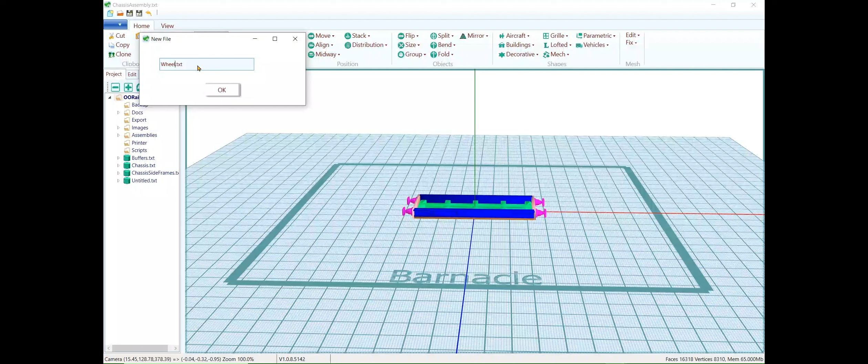Let's crack on. I'll create a new file to hold the wheel mount. Click on the project and add a new file to it, and type in the name of that new file.

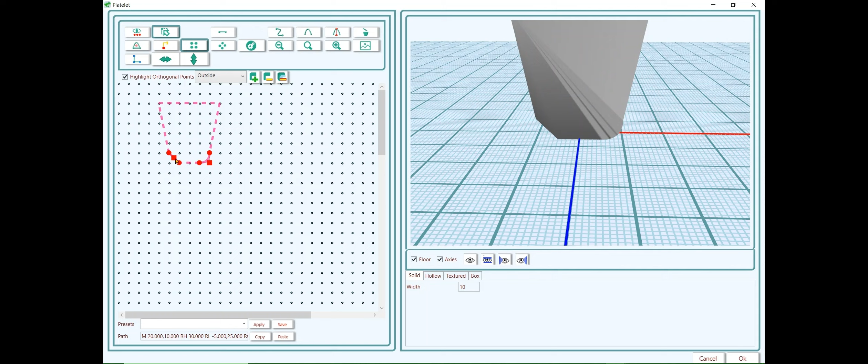I'm going to make the base of the wheel mount using a platelet. I'll start by drawing in the rough shape using straight line segments. I'm not worrying too much about the size here, I'll sort that out later once we've got the basic shape right. And close the shape. Now I'm going to curve the little bits at the bottom by turning them into Bezier curves. That's fine, and I think that's it really.

Now I'll rotate that onto the bed and center it. Now I'll adjust its size by going to the object palette and type in the dimensions recorded previously on the Inkscape diagram.

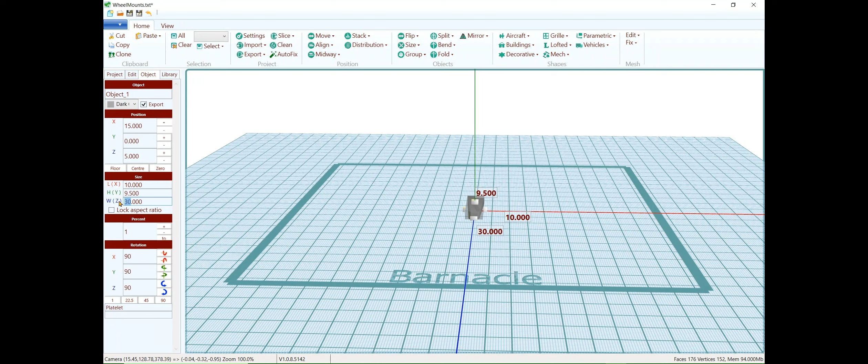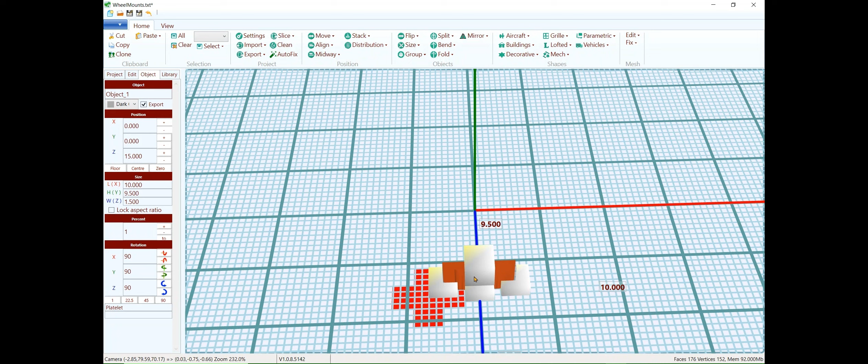That does not look right, something's gone wrong there. Oh, I've got the Y and Z dimensions the wrong way around. I'll just change those - hey, these things happen. I think that's a bit better. So let's center it again, I think, and floor it.

Now I'm going to make the mounting plate for the axle. I think I'll make that out of a squircle. I'll round off the corners and type in the dimensions I'm taking straight off the Inkscape plan. There's nothing magical here really, just type in the numbers.

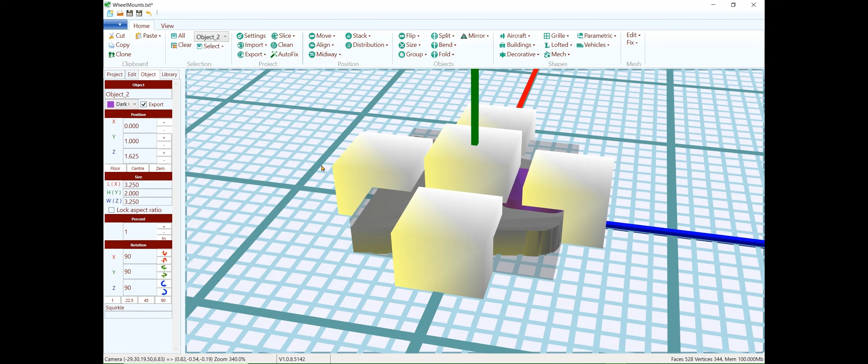That's it, and I think we'll change his colour to differentiate him from the base plate. Now I'll stack him above the base plate. That looks fine, zoom in a bit so we can see. I'm going to position him towards the front of the base plate using align front, then nudge him back a little using the cursor keys. That looks fine.

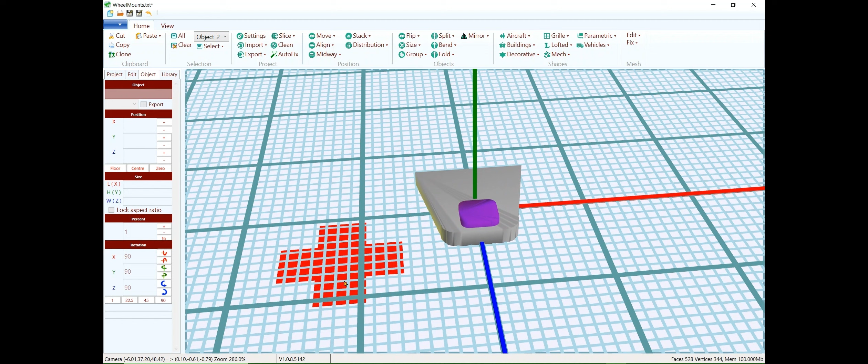So now I'm going to add a little lug to the back of that plate. I'll start by putting in a box primitive and resize it, making it fairly small. What do we think? Oh well, let's see what Inkscape says. Yep, and the Z.

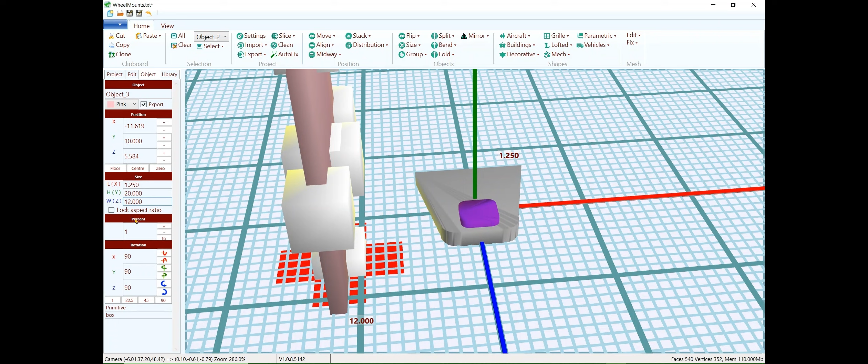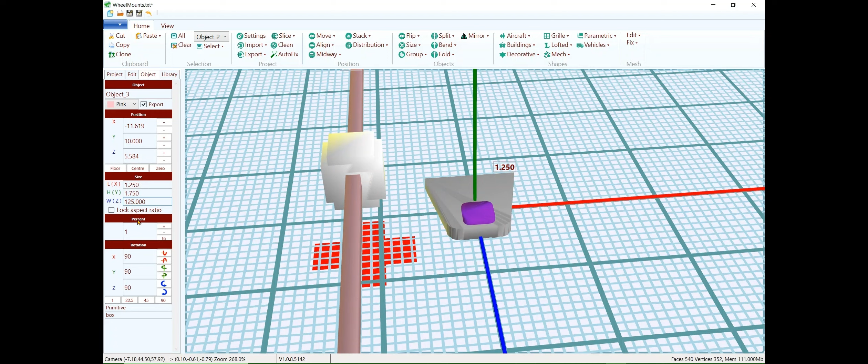Oh, do you know, I think there is some issue here with the way these text boxes are taking the numbers, I might have to look at that. It shouldn't be this hard to get these numbers entered, something's gone slightly awry. That 125 should be 1.25. Yeah, I'm having a little trouble getting this to set the right number, I think I'll need to look at the code to sort that. But there we are, we've got it now.

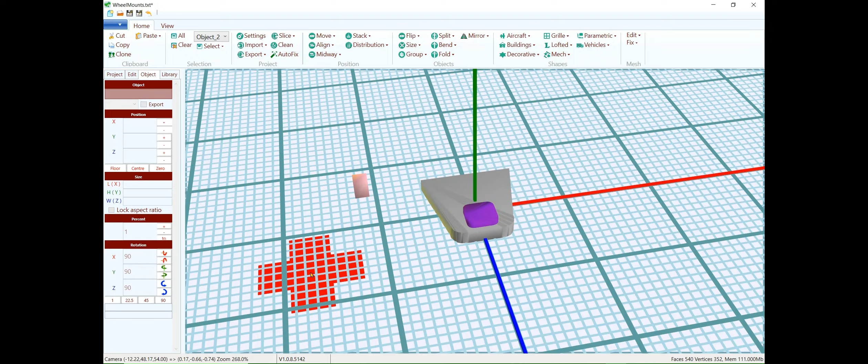So I'm going to stack this behind the platelet. Cool, that's the effect we're attempting to achieve.

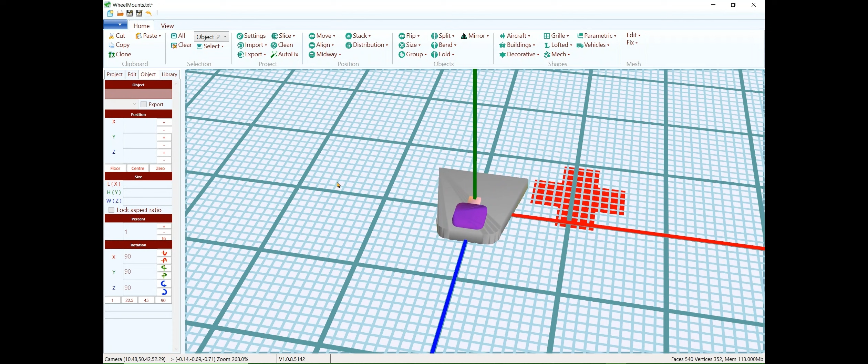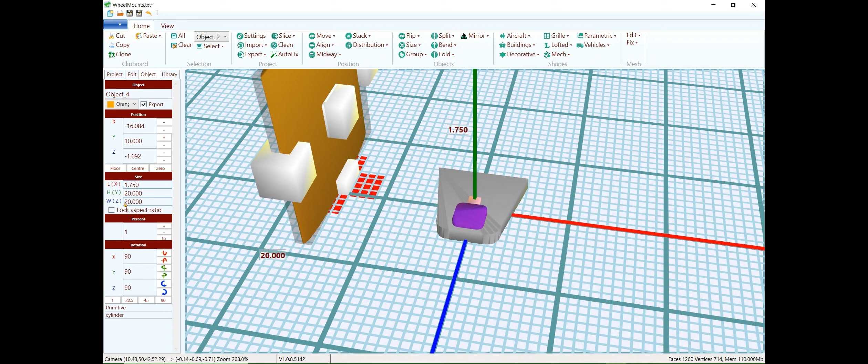Now I'm going to add the axle support, which I'll do just using a cylinder. It's pretty much the same as the last thing - I'll grab a cylinder here and resize it. That should be 1.75 as well. Cool, the height is a wee bit high at the moment, I think. Let's adjust that, it's not really particularly critical what the height should be.

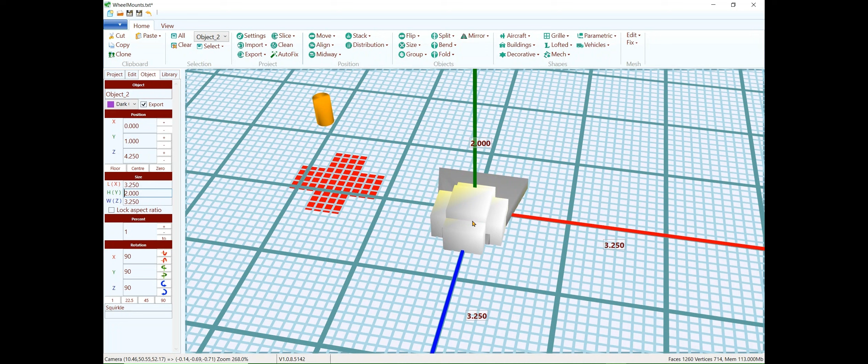I'm going to stack that on top of the support plate, and I think I might push it in a little bit as well. Let's have a look - yeah, it's a bit on the high side, let's push it down. Floor it down. Cool.

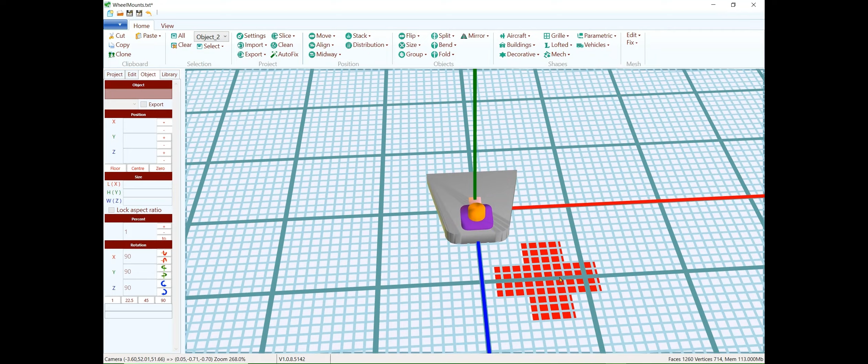So the next thing to make, I think, is the leaf spring. Not really going to make a complete leaf spring, we're just going to make a shape that looks vaguely like it. So again, I'll use a platelet, and count along these grid dots here - I know the shape I want to make. That's fine, these will actually form the leaves of the springs. Go along a bit and then reverse that pattern going up to the top.

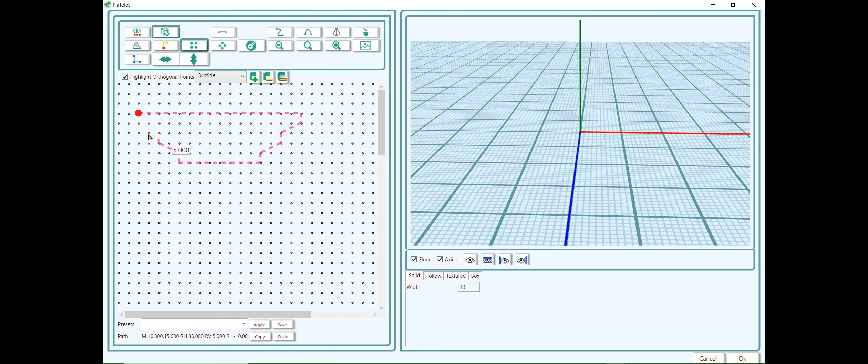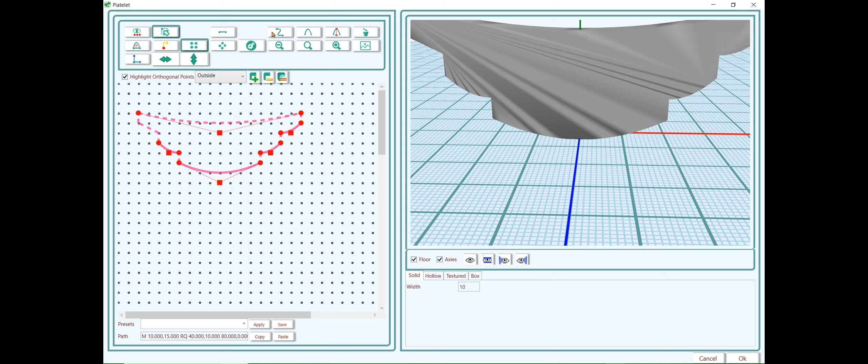It doesn't look like much like leaves at the moment, but now if I turn that into a bezier and drag it down, and the same on the bottom, then I'll go around and do the same with the edges. You could leave those flat, I suppose, but I think I'd prefer to just bezier those in as well. Just dragging the points to the nearest grid point, that'll be good enough for this. Once again, I'm not worrying too much about the actual dimensions, I'll sort that out once I've got the basic shape.

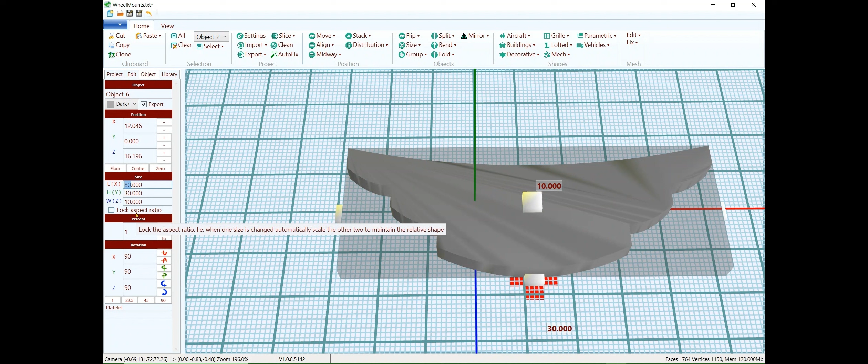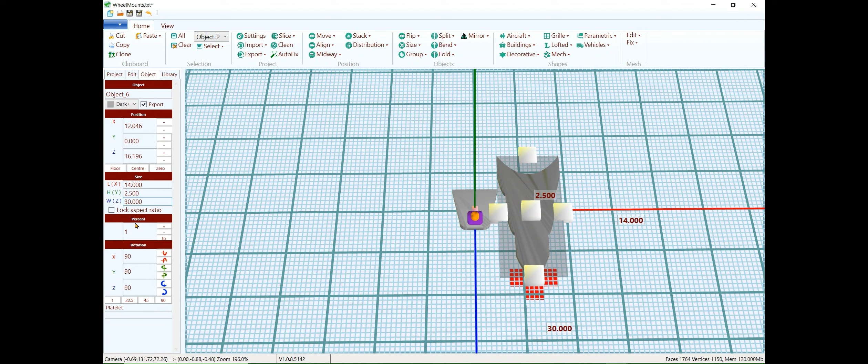Let's rotate that over onto the bed, so that's the correct alignment. Yep, it's big enough to cover the entire plate, so it is perhaps a little on the big side. Resize it then. That's cool. The height wants to be a little bit thicker than the base plate, I think.

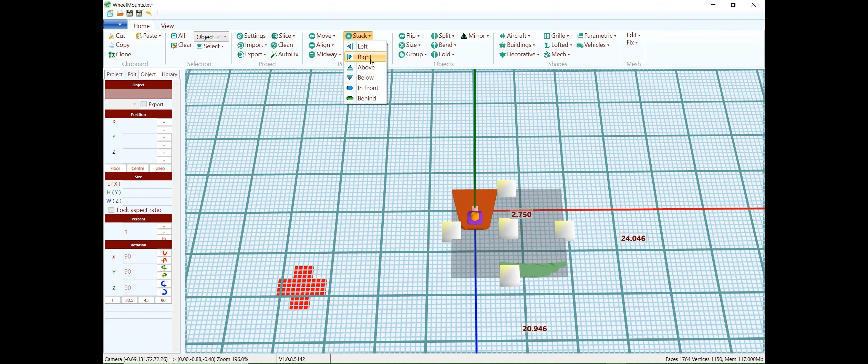So let's position it by stacking it behind, I think, yeah, behind the main plate. And then I'll align the back edges, that should bring it into position. Let's zoom in and have a little look. Yep, that looks fine.

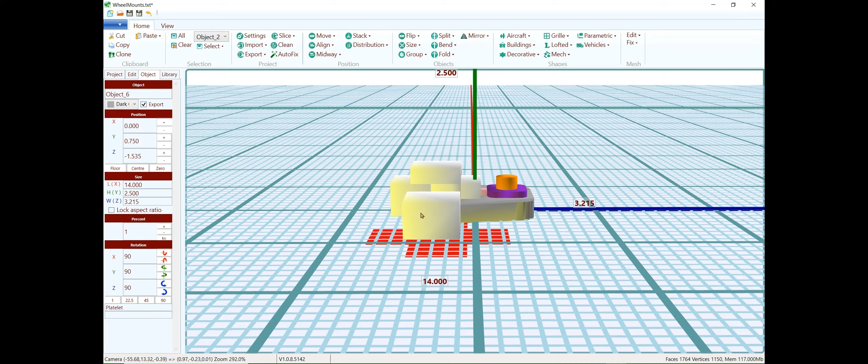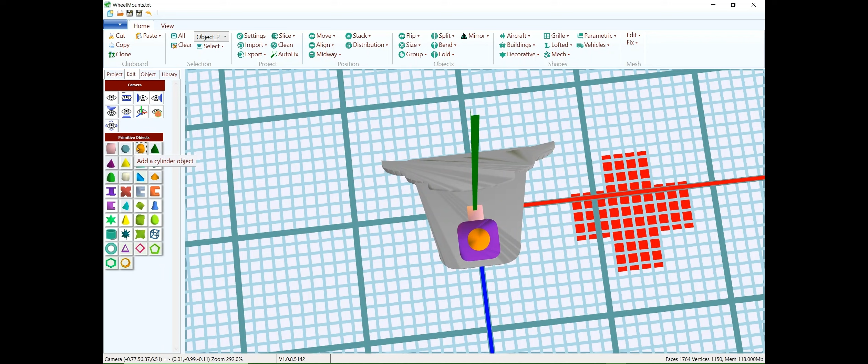The leaf spring has a couple of cylinders at each side. I'm just going to add those in as primitives. So I'll create the first cylinder and resize it now - actually, I'll make it the same size as the axle mount.

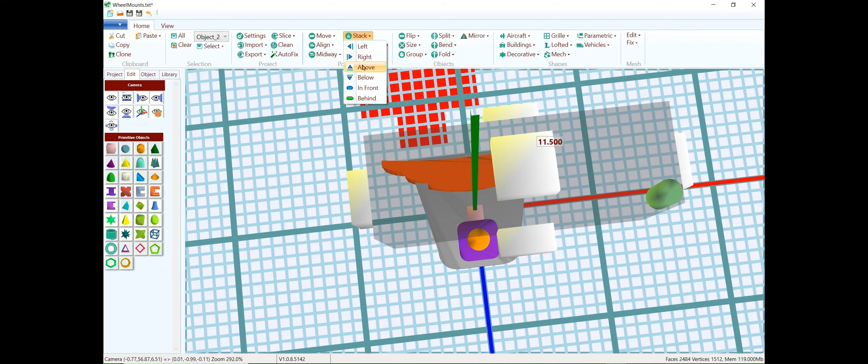I'm going to position that to the left of the springs just by stacking it there. I'll manually adjust its position, I think, by... no, that's fine, that's fine.

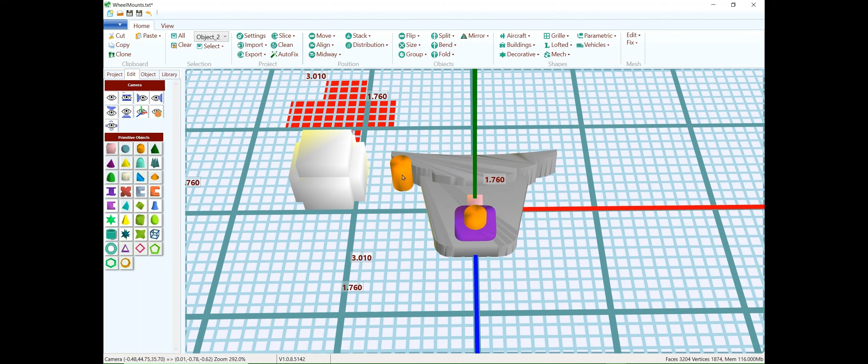I'm going to clone that and position the clone to the right of the springs. Back in white so we can see them, then stack it to the right and adjust it back in again. Yep, those look absolutely super.

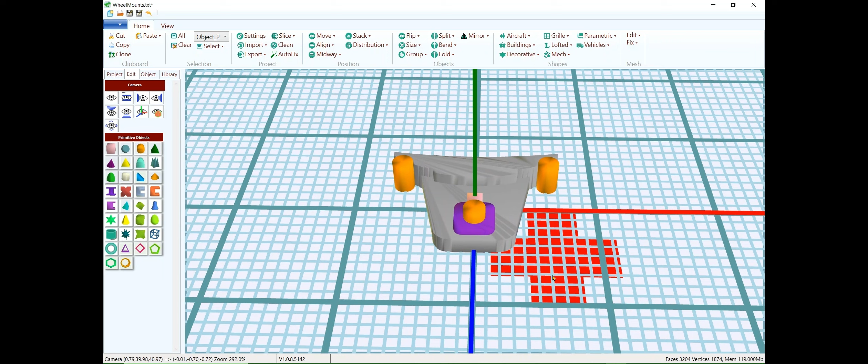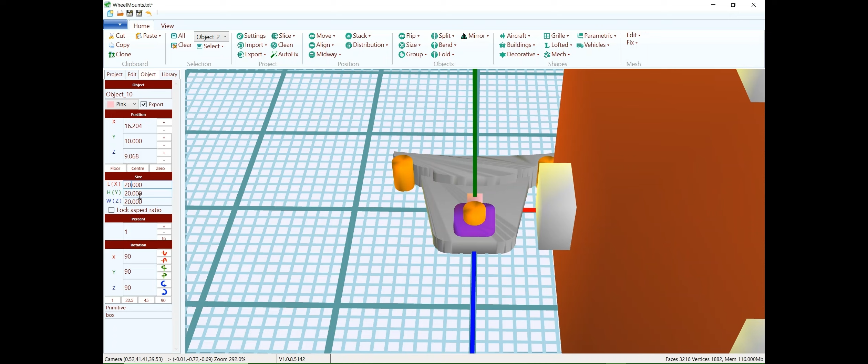So let's add some spring straps, just using basic cubes. I'll add a cube here and resize it, just adding a little bit of detail to the strap, and change its sizes to something reasonable.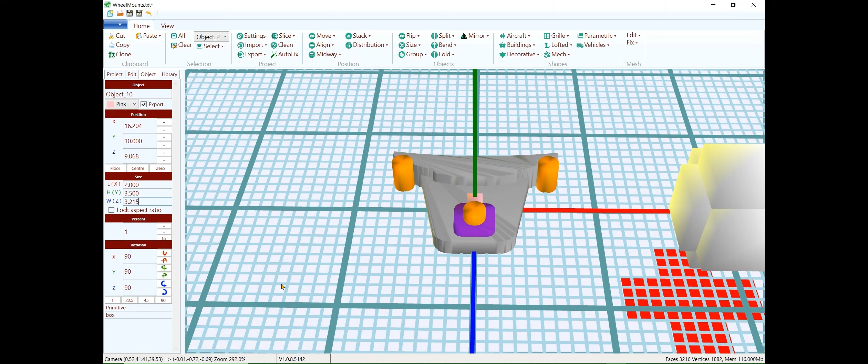Yeah, it's probably about it, I think. No, we don't want it too deep either, do we? That's fine, and now let's move it onto the spring itself.

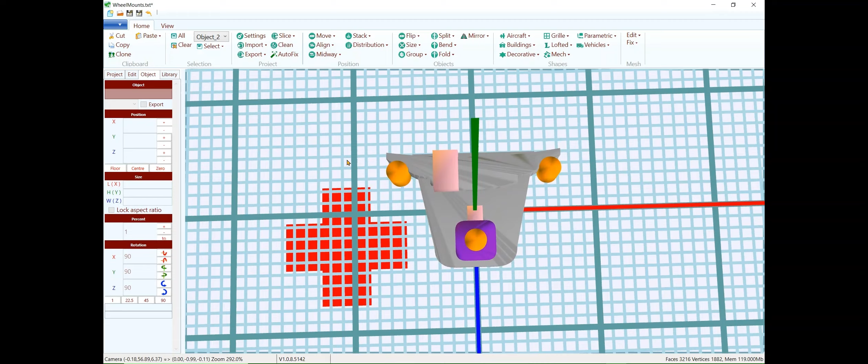I'll stack it to the right of the cylinder and then just nudge it over a little bit. It looks okay, so I'm going to clone it and move it to the other side. Again, I'll stack it to the left of the other cylinder this time, and nudge him in a little bit.

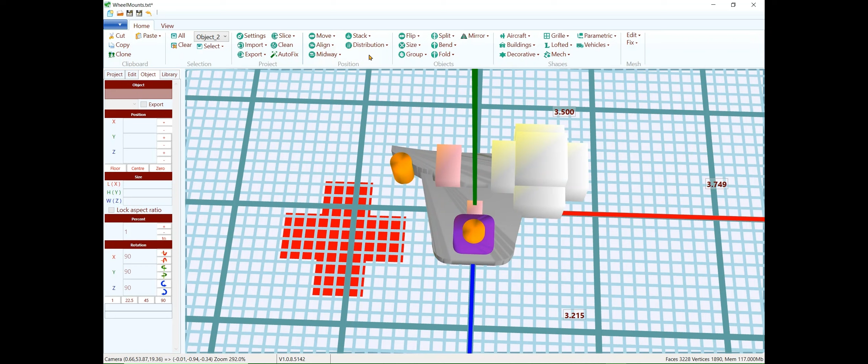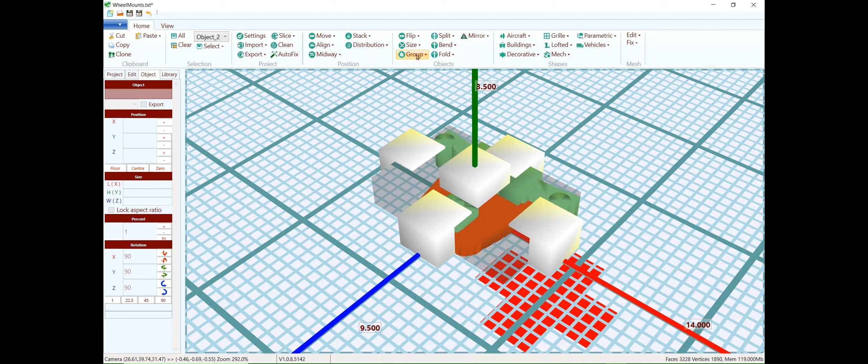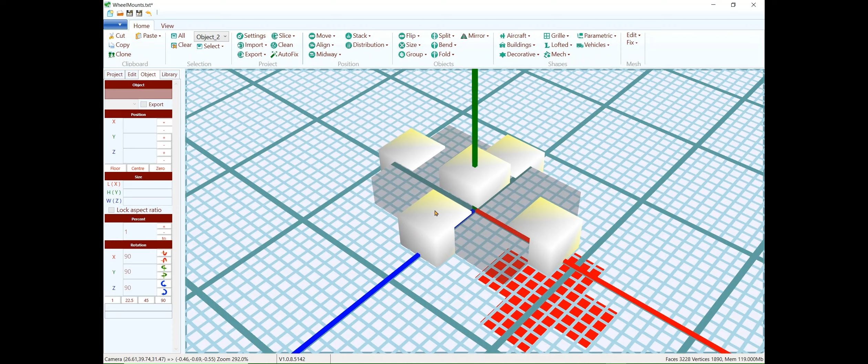So that pretty much looks like a completed mount. I'm going to turn it into a single object by unioning the whole lot, and give it the correct name here, which should be wheel mount. I think I'll give it a more distinct colour, something like magenta perhaps.

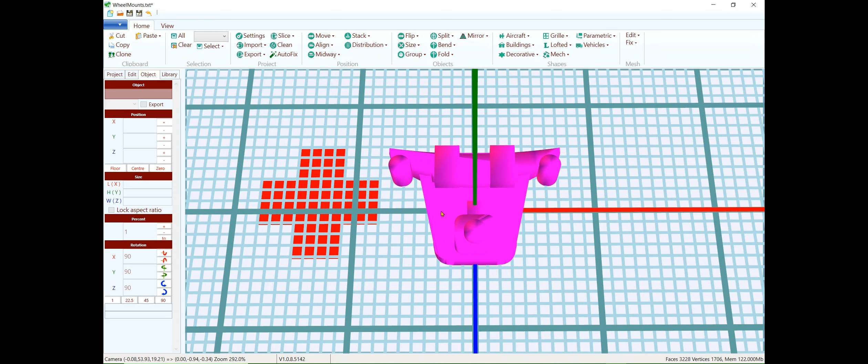We actually need 4 of these wheel mounts, so I'm going to clone the existing one, diagonally clone over to the left hand side. That's fine, and I think I'll go and change its name to wheel mount 2. That's fine.

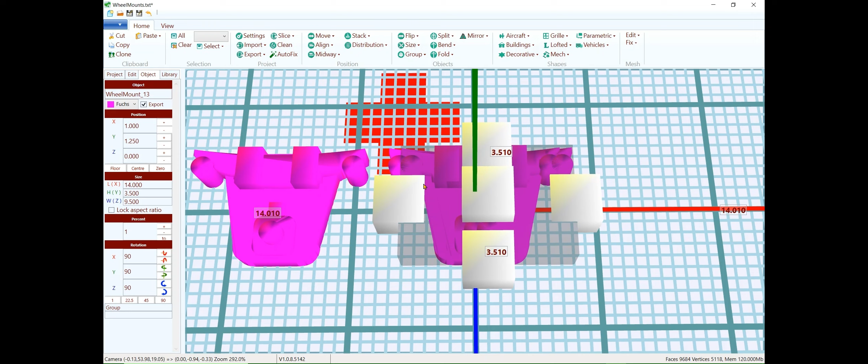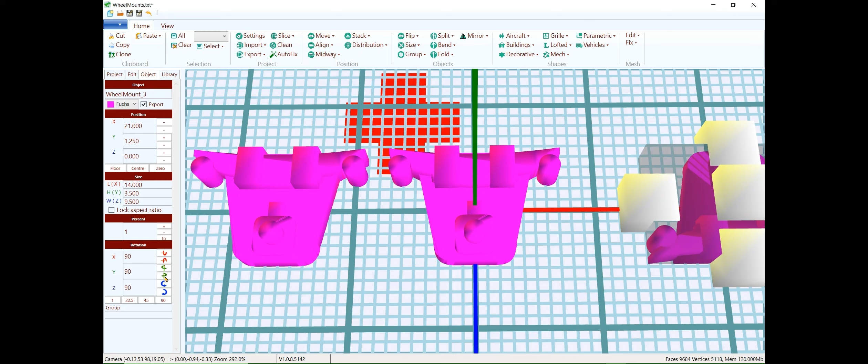I'll make another clone here, I think, and move him to the right this time. I think I'll rotate it and position it in front of one of the others. I'll nudge them away a little bit to allow a gap for printing.

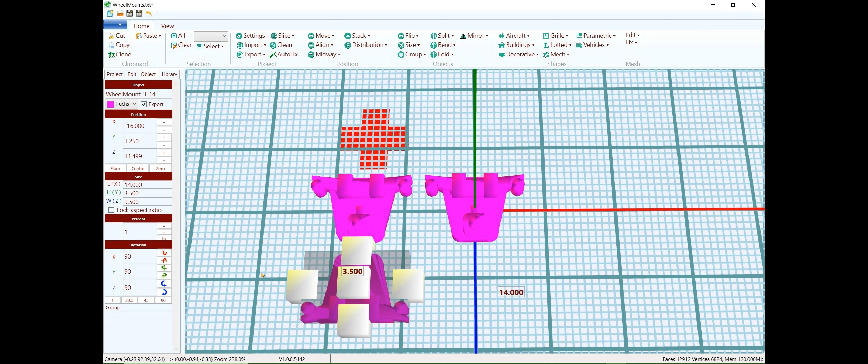And I'll make another clone of him, and I think I'll just align this one in front of the first mount. I'll have to sort his name out as well - should be the fourth one, shouldn't it? Yeah.

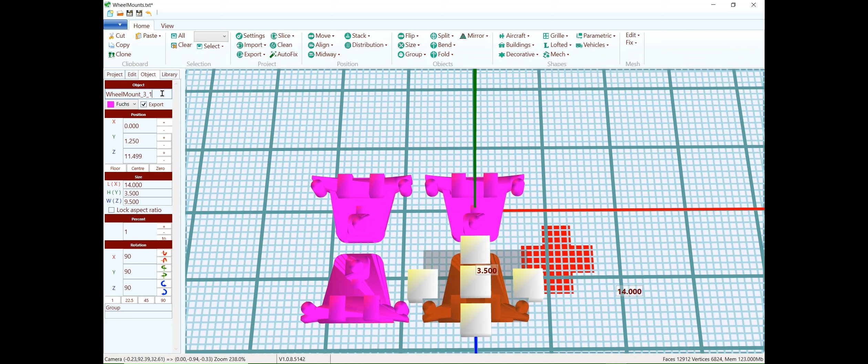I think I'll move them all to the center of the bed for printing. And save it. We're done.

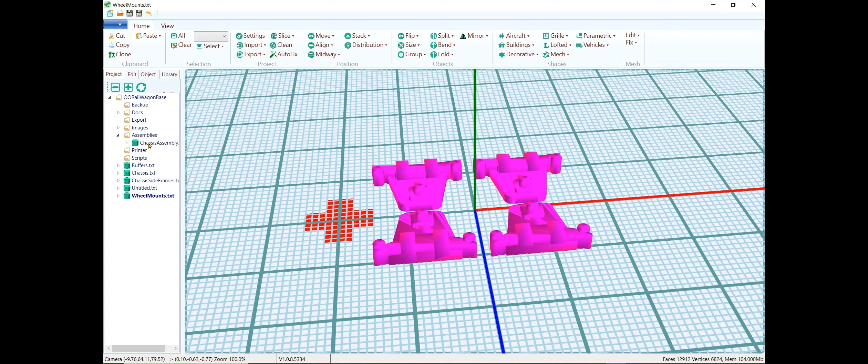Perhaps we should go ahead and put those into the assembly. Open the assembly again and add a reference to the wheel mount file.

I'm going to select one of the mounts at the back and I'll rotate it, and stack it above the rear beam. Now I'll move it roughly into position by aligning the lefts. Now I'll nudge it 6 millimeters to the right using the cursor key.

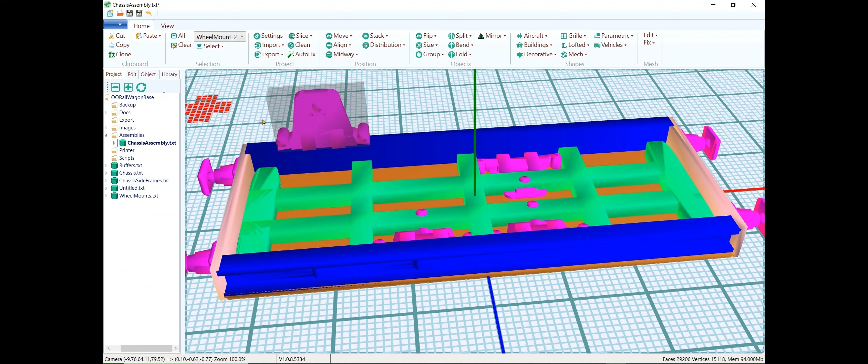I'll do the same again with this one, rotate it and stack it above. Oh, whoops, I've done that wrong - stack it above and align right, not stack right. Now I'll nudge it back in again using the arrow keys, again about 6 millimeters.

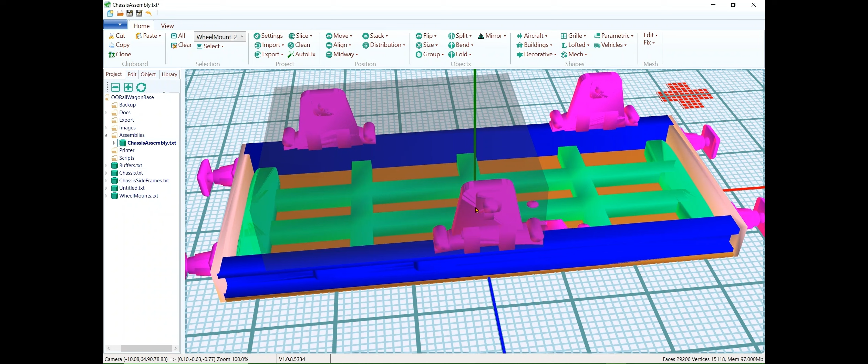So I'm going to take one of the front ones, rotate, stack above the chassis side. This time I'm going to just align it with the one that we have already positioned on the back.

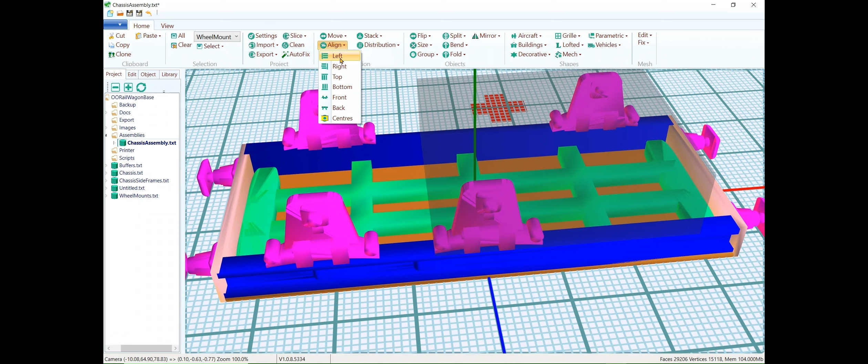And I'll repeat that with the remaining one: rotate, stack above, and then align it with the one at the back. That's fine, that's all the wheel mounts in position.

Everything looks okay. I think I'm going to try and add the chassis side frames at the same time, but I think I've made a mistake on those, so I'm just going to open it again and have a look. Oh yeah, it wants me to save the assembly first, I'll do that.

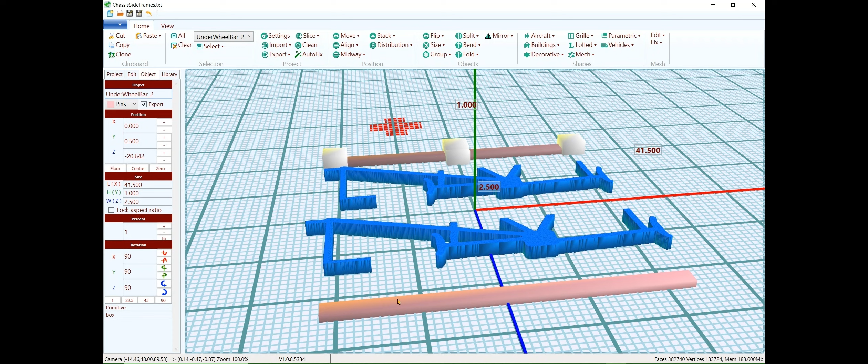Yeah, I think I've got the sizes of these wrong, so I'll need to adjust some of them. Yeah, that's right, 45 is the correct one, but I think the one I've got at the back is actually smaller - yep, that's 41, so I'm just going to make both of these the same size, to 45. I'll just resize them.

And I think somehow I've done the same with the side frames - I've got one bigger than the other, so I'm just going to resize those. That's fine. Now back to the assembly.

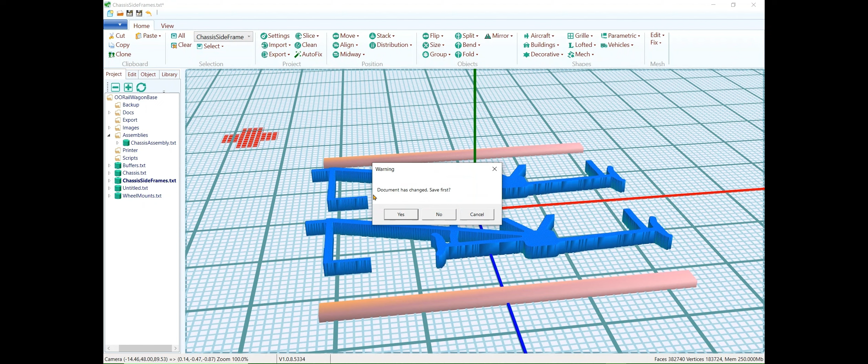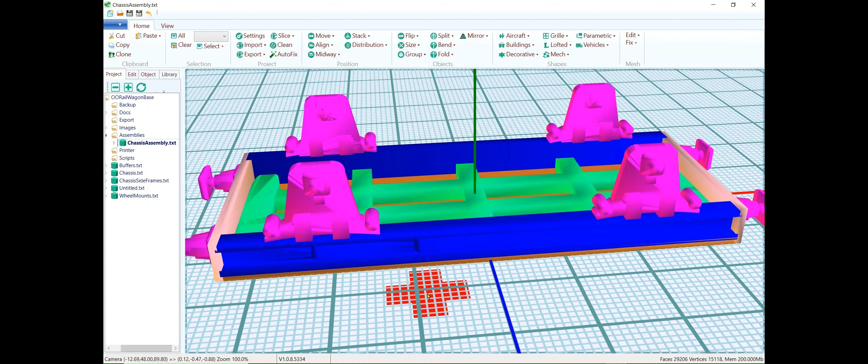A little while for the assembly to come up because it's got quite a bit of data in it now. But there it is. So now I'm going to reference those side frames in, just adding the file name.

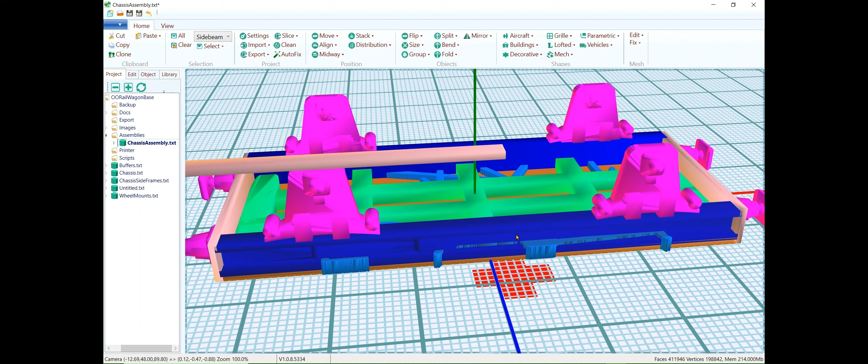I'm going to position one of the frames - I don't even know what you call it - I'll just stack it above one of the mounts for the time being, and then move it along so that... yeah, that's fine.

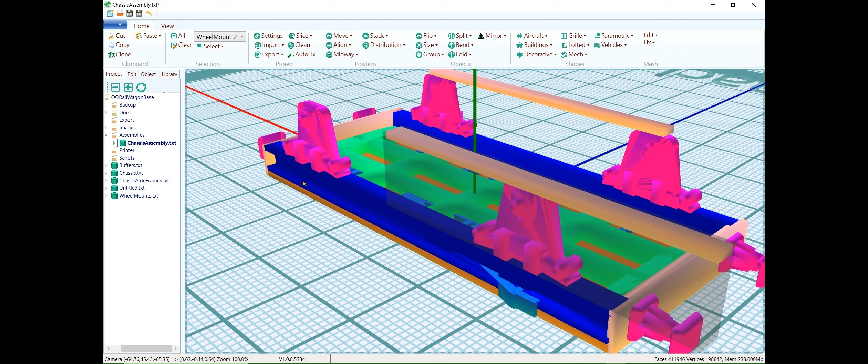It's got to connect those two mounts, and I'll do the same with the one at the back. Just stack it above and then move it into position.

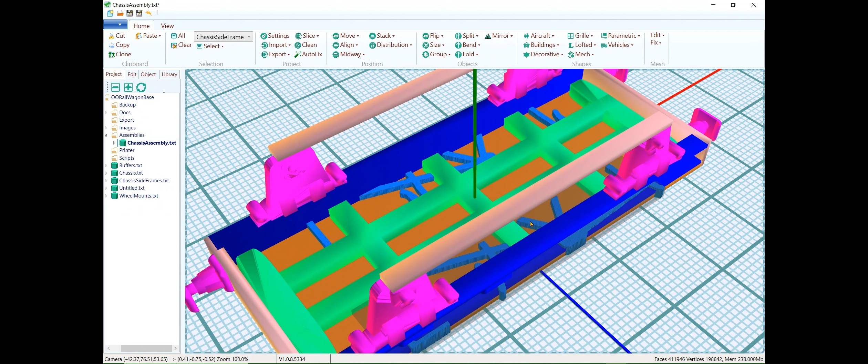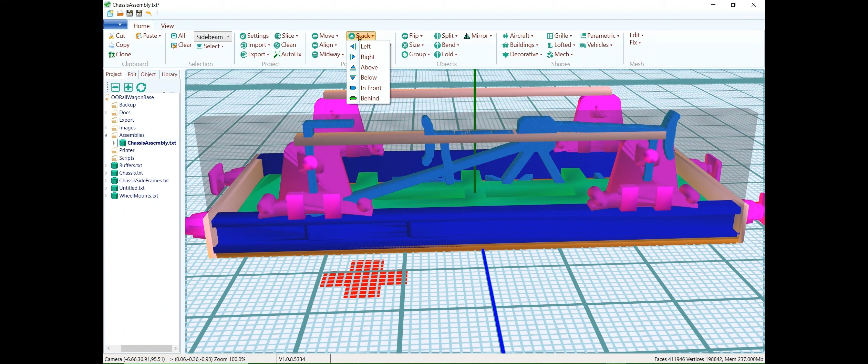That's fine. I'd like to get these side frames into place as well, so I'm going to select one and rotate it away from me and stack it above the side beam. I'll move it to the left of the beam. Oops.

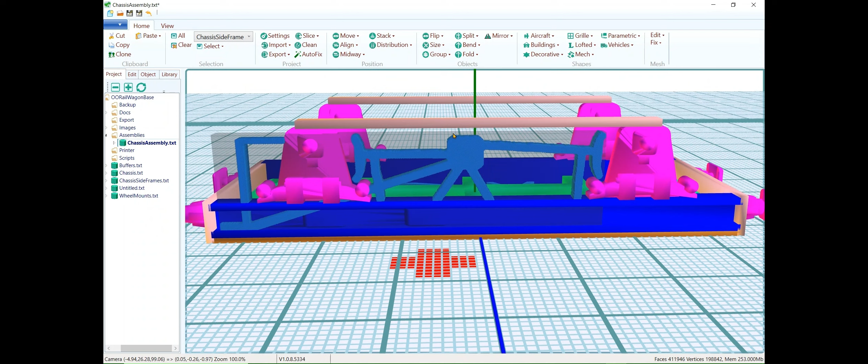And it needs to be manually positioned a little bit - this is being done by eye, I'm afraid - so that the diagonal parts are actually resting on the side beam. Just nudge that down by eye until it goes down and fits. There's still a gap there.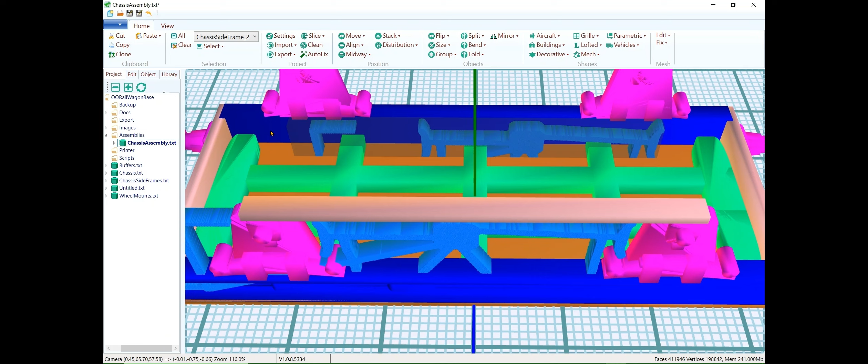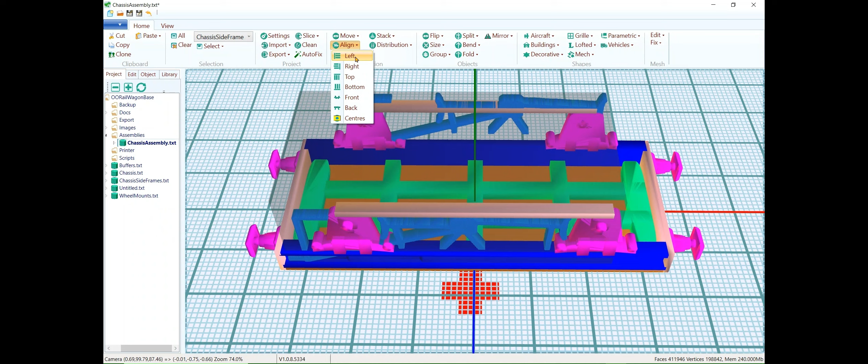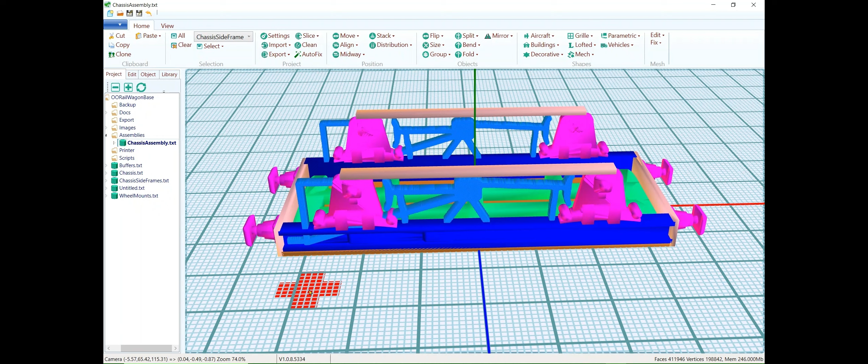I'll position the one at the back by just aligning it with the one at the front. Side frames are actually not making contact with the side beams like they should, so I'm just going to nudge the front one down.

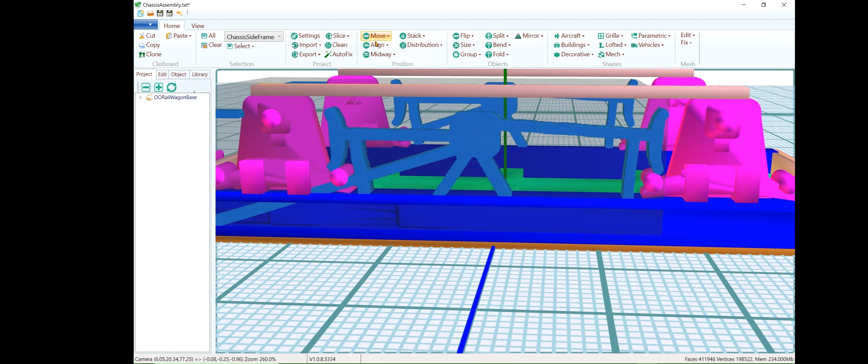Now I think I'll select the two beams and just align the top of the back one with the top of the front one. So they should both be in the right position now. That looks fine.

So that's it for this video and this part of the project. Next time we'll look at making the couplings.